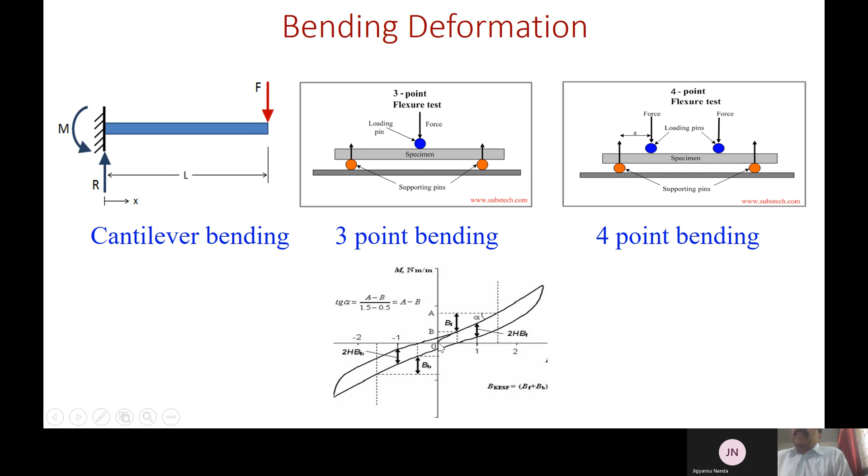In 3-point bending, there are two supports at the two rear ends and a bending load at the center. Similarly, in some cases there are two loading bending positions and two supports at the two rear ends. This is a typical bending couple and curvature curve, which we will discuss later.

So what exactly do we look into for bending? Look at a straight beam subjected to a load at the center, which is a 3-point bending system in which we try to measure the deflection. The bending stress is given by sigma equals MY upon I, where M is the moment about the neutral axis, Y is the perpendicular distance to the neutral axis, and I is the second moment of area about the neutral axis.

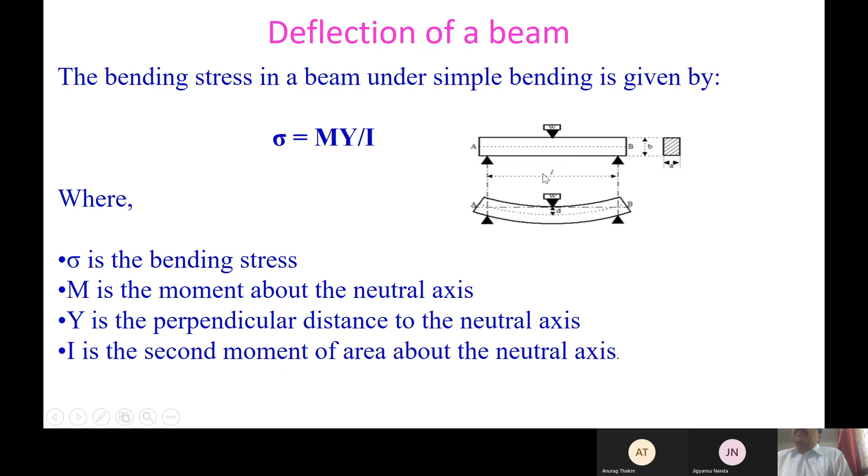Remember, this principle is used when the material is in stiff, rigid form, not flexible form. So this is the classical beam formula for bending stress, where we calculate bending stress, flexural modulus or bending modulus, sometimes called bending rigidity.

Bending stress is given by sigma equals 3PL upon 2WT square, where P is the normal force, L is the beam length, W is the beam width, and T is the beam thickness. Y is the deflection at the load point.

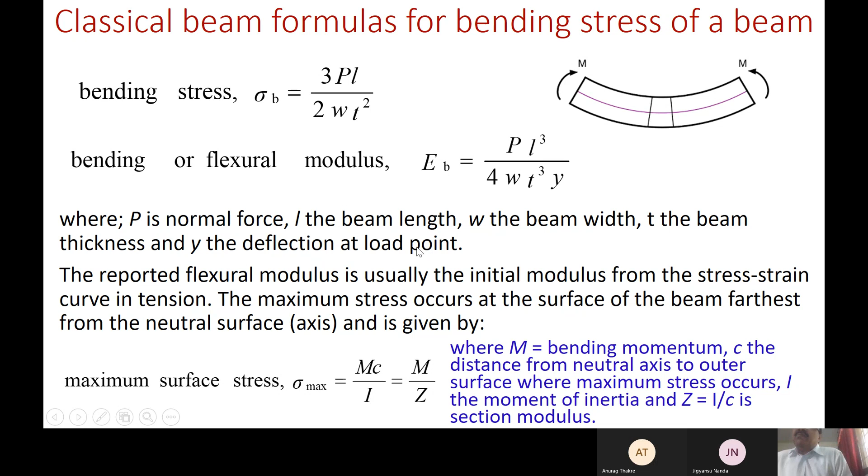Deflection at the load point means: if you take the beam, it will be straight, and when load is applied it bends—so from this central axis to the original center axis is the deflection. This is how we calculate the bending parameters: number one, bending stress; number two, bending modulus. But in this subject our objective is something different, which I will discuss gradually. Let us understand the different terminology related to bending deformation.

The terminology: sometimes we use stiffness, bending rigidity or flexural rigidity. For our fabric, which is flexible, we use another term called bending length instead of bending rigidity. Stiffness, bending rigidity and flexural rigidity are all one and the same thing, which is also the same as bending modulus.

Modulus is nothing but rigidity, a resistance to deformation. This is the general literary meaning of modulus. If it is resistance to bending deformation, it is bending modulus. If it is resistance to tensile deformation, it is tensile modulus. If it is resistance to compressive stress, it is compression modulus. If it is resistance to torsion, it is torsion modulus.

So stiffness, bending rigidity, flexural rigidity or bending modulus is one and the same thing, whereas bending length is a special bending property parameter used in textile material, particularly for fabric, which is a flexible material.

Then there is another concept in bending, called high stress and low stress. Normally in textile, bending is a low stress measurement. As I said, in a cantilever system, when we test the bending rigidity or bending length of a material, we don't apply any load, because fabric is flexible and bends on its own weight due to gravity. Whereas in high stress testing, like 3-point bending or 4-point bending, some extra load is applied. But normally bending is low stress.

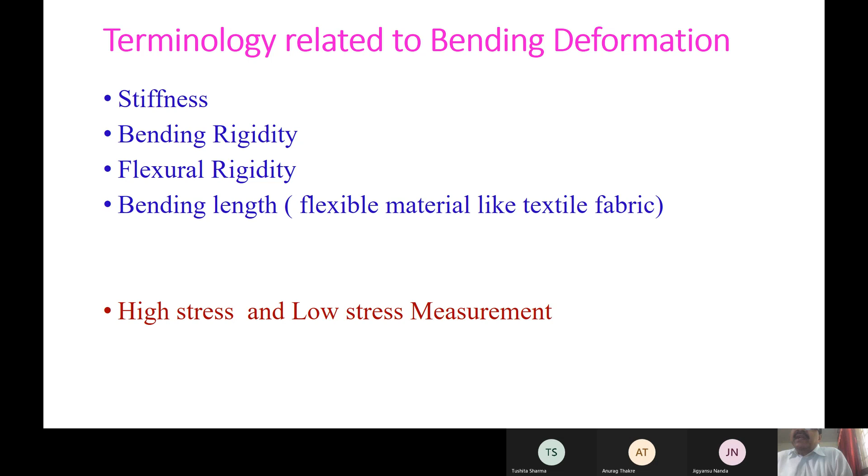So usually people use the term in bending called flexural rigidity. Flexural rigidity is defined as the force couple required to bend a non-rigid structure by one unit of curvature, or it can be defined as the resistance offered by a structure while undergoing bending. We will derive some formula for how to calculate this.

When it comes to textile fabric, bending rigidity is a measure of the couple required to bend the fabric to a certain curvature. In textile testing, we measure bending length, where we bend the fabric to a particular angle of 41.5 degrees. It is very closely related to fabric weight and thickness. This rigidity purely depends on the GSM of the fabric, meaning gram per square meter, areal density, and the thickness of the fabric.

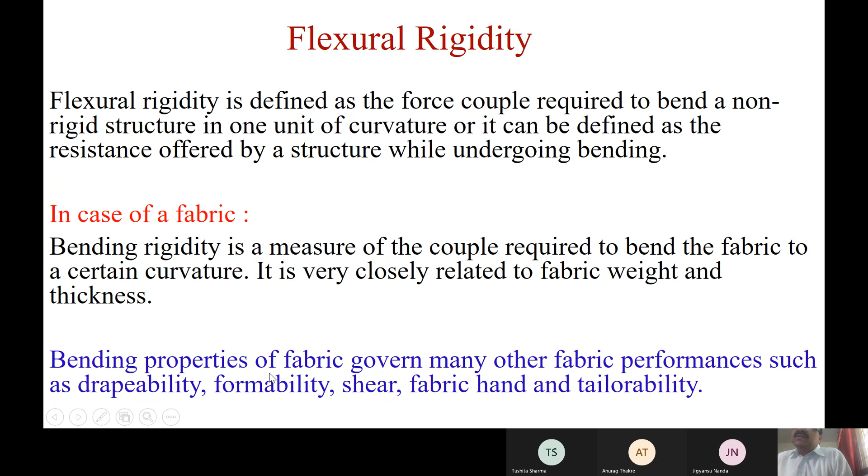Bending properties of fabric govern many other parameters like drapability, formability, shear, fabric hand, and tailorability. These are quality parameters of fabric governed by its bending properties. All these important fabric characteristics are especially measured for apparel fabric that needs to be converted into a garment. In that case, all these properties are measured and they are predominantly governed by fabric bending property. That's the reason why we are interested in measuring bending property.

As I said, we measure bending length, and there is a relationship between bending rigidity and bending length, which you must have come across in textile testing. In a textile structure, whether woven or knitted flexible fabric, bending is an important deformation affecting both functional and aesthetic aspects. Functionally, bending length is used to calculate drape.

We measure drape in case of upholstery, furnishing fabric, and also some dress materials like suiting. Bending rigidity is directly or very intimately related to fabric hand value for clothing material. Creasing and wrinkling of fabric and garments are also associated with bending deformation, but this bending is a high stress bending.

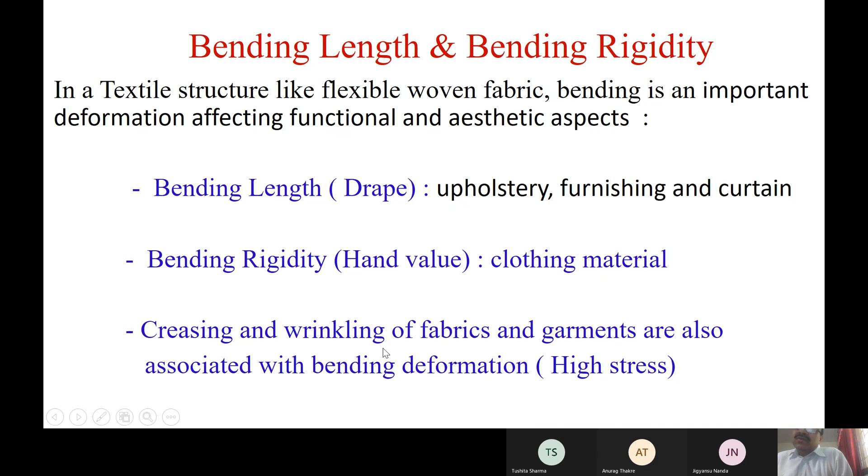As I said, there are two types of bending: bending under high stress and low stress. Bending length and bending rigidity, used to measure fabric hand value, involve low stress. Whereas when we try to create a crease or wrinkle in fabric, that is also a bending deformation, but in that case bending is high stress bending, where we apply a very high load. So what is the difference between crease, wrinkle and bending then?

Look here, some creases are formed, or wrinkles are formed. A wrinkle is nothing but the fabric being bent. So what is bending, what are wrinkles, and what is the difference between crease and wrinkles? Creases are a fold in fabric introduced unintentionally, and it is not desirable.

The definition of a wrinkle is less clear. However, some define wrinkles as three-dimensional creases. Normally, when you put a crease by ironing, you just fold the fabric and iron it. But look at these creases - they are three-dimensional, making some very odd shapes.

Some others also define wrinkles as short and irregular creases - these are irregular, random creases. So crease resistance is the ability of a material to resist or recover from creasing. Crease recovery is a specific measurement of crease resistance. When we measure the crease property, we normally measure crease recovery angle.

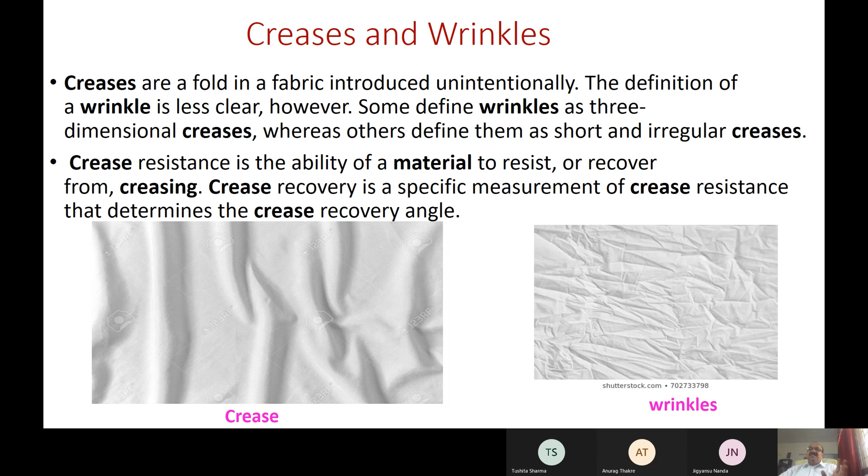Before we discuss some mathematical model to predict bending behavior of a fabric, let us understand what are the different structural attributes of a fabric that contribute to bending or stiffness.

Resistance to bending of a fabric is due to both frictional force and elastic force. We have already discussed this a little in the rigid thread model. While bending, there is some friction; interfiber, inter-yarn friction plays an important role.

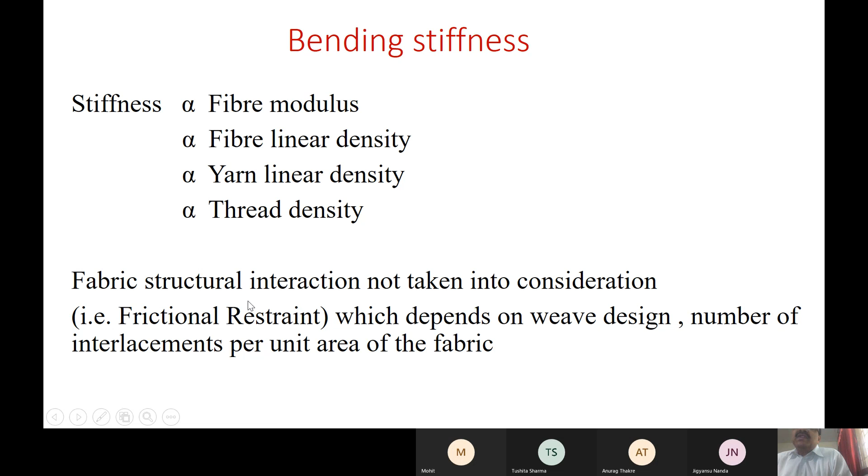These frictional restraints also depend on weave design and cover factor. Cover factor means nothing but the number of interlacements per unit area of the fabric, and these are all called fabric structural parameters which contribute to frictional restraint. This frictional restraint is one of the important contributing factors to fabric rigidity, as you have seen in the previous table, friction.

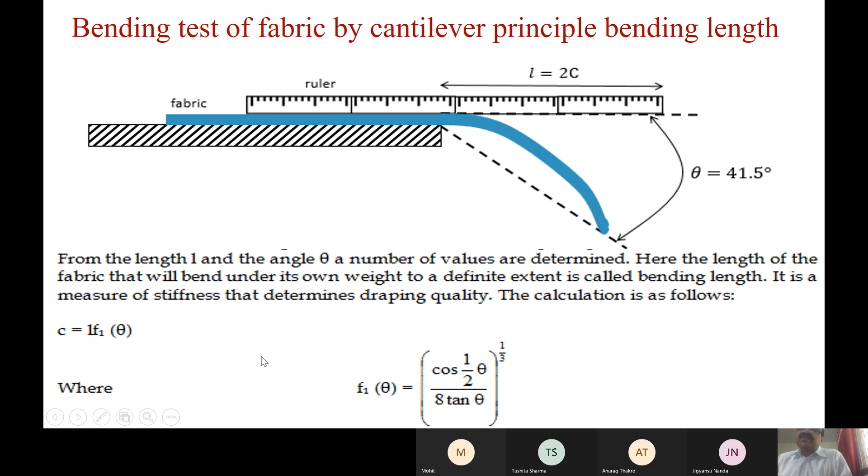So friction depends on many things. This you have already come across in textile testing, how we measure the bending length of a fabric. Here, the fabric is sliding on this table, and we slide the fabric forward until it makes an angle of 41.5 degrees, and at that point we see what is the length of the fabric, which is called bending length. This angle is a function of a formula already discussed in textile testing, so we are not discussing this again.

Similarly, we rotate the disc anti-clockwise and clockwise. When it comes to this side, the fabric will also bend. Then what we do is plot a curve between couple and curvature. Couple is nothing but the gravity, which will depend on the weight of the fabric.

Curvature is the angle it makes, from where you can find out curvature. Curvature is nothing but the reciprocal of radius of curvature. So curvature is 1 upon rho, how much radius it makes.

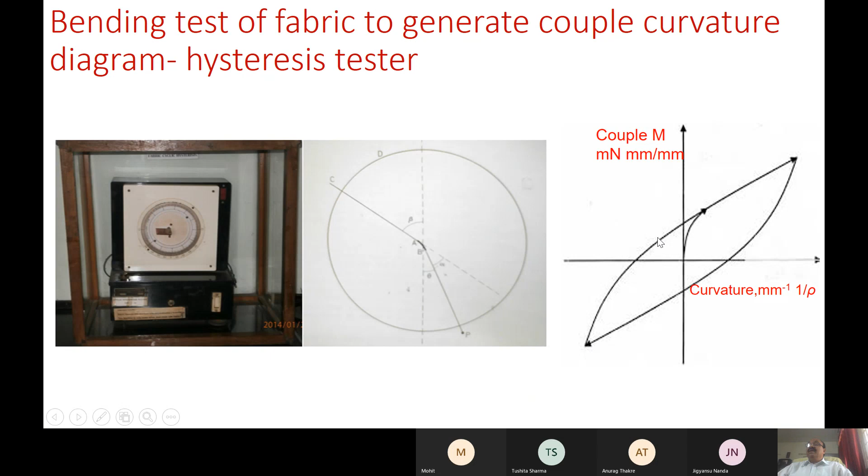Then we plot a curve, and you will find this is a typical bending couple curvature curve. First we take the fabric anticlockwise up to this point, then come back to center, then again go the other way up to this point, then again come back to the center. So you can see the 4 phases from here to here, then return, from here to here, then return to origin. This is how this couple curvature curve is created.

So this is a typical bending curve of a fabric. The bending deformation is non-linear along the curve OABC. If you look at the complete path from this to this point, it is a non-linear relationship between couple and curvature. The bending recovery is along CEM.

So first it goes to this point. When we return the fabric, meaning rotate in opposite direction, it comes back to this point. So the curve does not return in the same path, it returns in a different path, and the new path is CEM instead of

OABC. So the point D on the x-axis represents non-recovery from bending deformation. From here, where we started, it has come to this point. This is non-recovery from bending deformation.

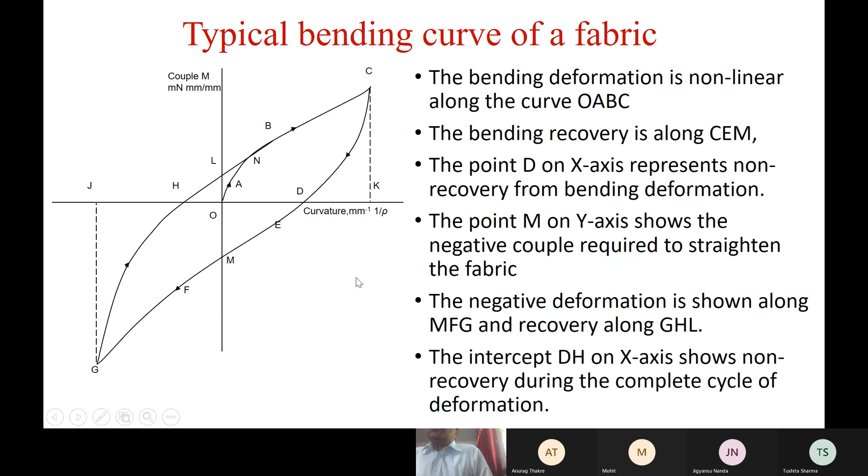So what happens from this curve? The most important component we found is the hysteresis behavior. The distance between the two intercepts determines the bending hysteresis, meaning energy loss, and this energy loss is mainly due to the inter-yarn and inter-fiber friction. We will theoretically calculate how much this amount is when we discuss developing a model to predict the bending property of the fabric.

So this is how you can calculate the bending recovery percentage and residual curvature from this couple curvature relationship. On the same curve, the intercept Lm on the y-axis reveals the frictional restraint during the deformation. The area enclosed within the curve is the energy loss due to friction and is termed hysteresis. So the higher this area, the more the friction loss, the more the hysteresis value.

The intercept OD, on the curvature axis, is termed the residual curvature. In practice, it is calculated as half of the intercept HD to eliminate the asymmetry.

So the recovery percentage is given by the KD value, KD over OK into 100, which is the same as KD plus JH over JK into 100 for more accurate results. The residual curvature is given by HD over 2 as an average value, because it is not very symmetrical, the distance from here to here is not the same as from here to here. So normally when we calculate residual curvature, we take the complete intercept distance divided by 2.

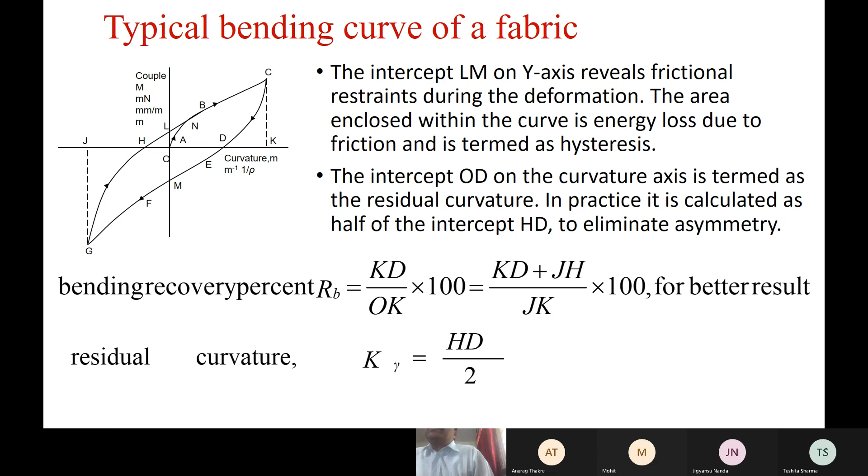This is how from a couple curvature plot you can find out the bending recovery percentage and residual curvature, apart from the bending hysteresis, which is the complete area enclosed by the couple curvature plot. And as I said, this hysteresis is predominantly due to the frictional restraint, which we discussed earlier in the rigid thread model.

Now, in a typical bending curve of a fabric, there are two more terms. One is called cohesive couple, which is the couple required to restore zero curvature, given by M naught, which is Lm over 2. Just like DH was the residual curvature, similarly here it is called cohesive couple, Lm over 2.

And initial flexural rigidity is the ratio of couple to curvature. So at any point on this curve, when you take the ratio of couple to curvature, it's called initial flexural rigidity.

Although we have discussed the rigid thread model, look at when bending starts from this original point. Initially, the resistance to bending is very high. As you can see, the curve tilts towards this couple axis, meaning the resistance is more. This is because of the friction. Gradually, when the load increases, the curve tilts towards this curvature axis.

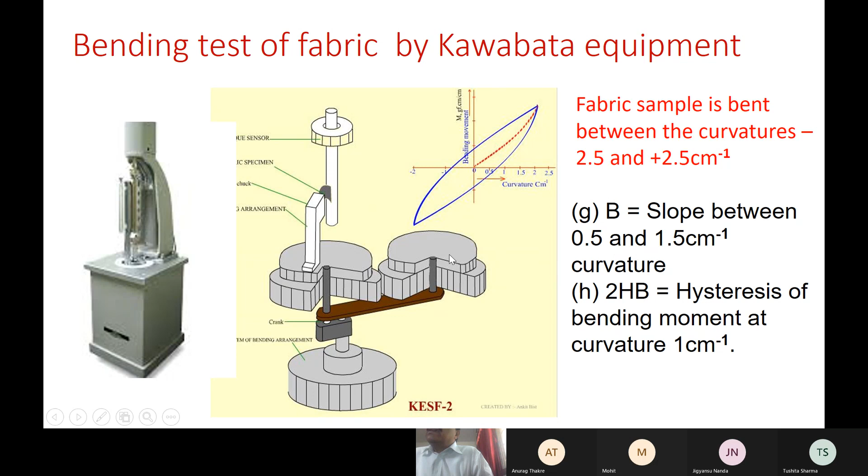That perception depends on many mechanical properties: tensile, bending, shear, compression, friction, etc. Bending is one of the major contributors to this fabric hand value. The bending rigidity and bending hysteresis - the B value and 2HB - these two figures we get from this test are used to calculate hand value in a customized hand equation developed by Professor Kawabata. He set up an equation called the equation of fabric hand, in which these are also parameters - there are 17 parameters in that equation, and these two are included in that hand evaluation equation.

Okay, this rigidity we can skip. The estimate of G minimum - this point I have already told you, not necessary now.

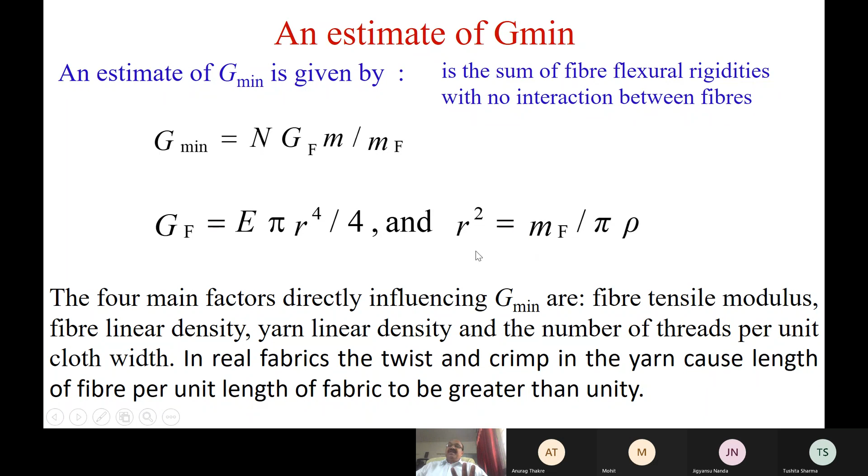We will go straight to bending of woven fabric, so the model starts from here. Whatever I discussed is fundamentals, just to understand what is the bending rigidity of a fabric, what are its applications, and what kind of measurement we carry out. Normally the bending test is a relationship between couple and curvature, and from the curve we get residual curvature, bending hysteresis, and initial resistance.

So many parameters you can get from this couple-curvature relationship. But now our aim is, as a theory of textile structure, if we know the fabric construction parameters - which we have used in all geometry, in the rigid thread model, also in tensile properties - we will do the same thing here: how can we predict the bending rigidity of a fabric if the fabric construction parameters are known?

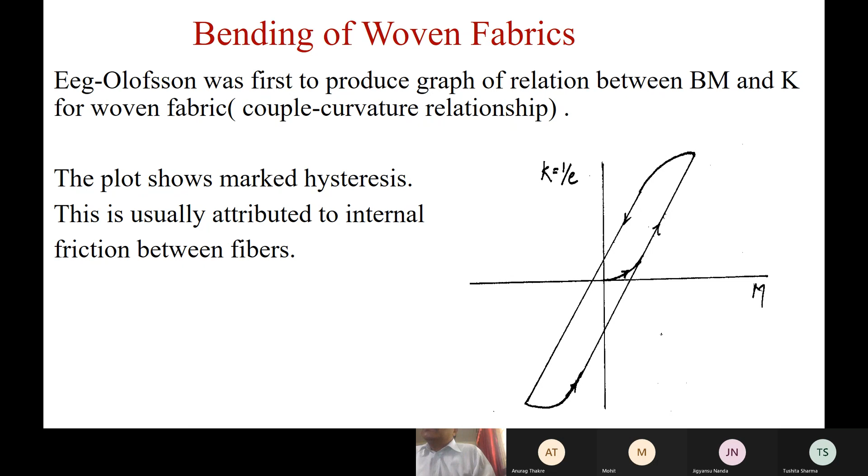This is the conclusion of Olofsson in his very first study. The study was related to the relationship between couple and curvature in bending deformation of woven fabric. Recall, I have already discussed giving some idea about this in the rigid thread model. I am doing the same now because it is basically related to bending studies of woven fabric.

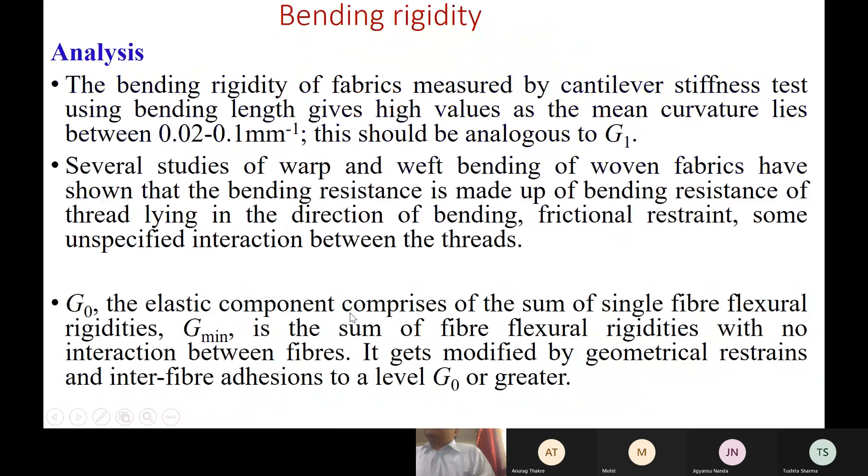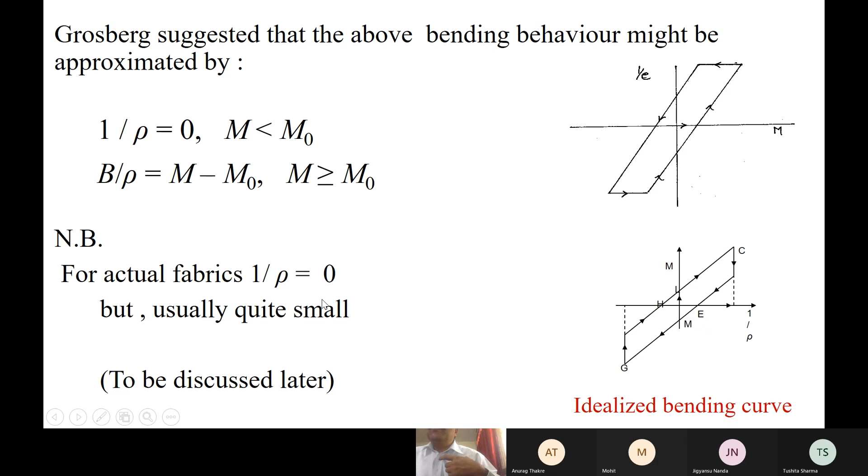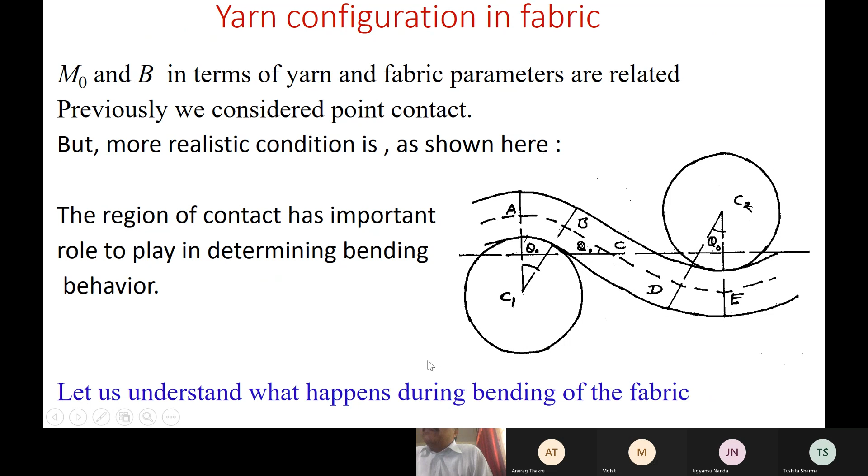During bending, the region AB, look at, tends to increase. If the fabric will bend, meaning couple will be applied here, it will come down, down, down. Initially, the contact length was AB. When it will bend, this AB will increase. And the region DE, in this case, will decrease.

So what is the logic of the model? I'll stop here explaining this logic of the model, the actual model, because we cannot complete it in this class, and I'll cover it in the next class.